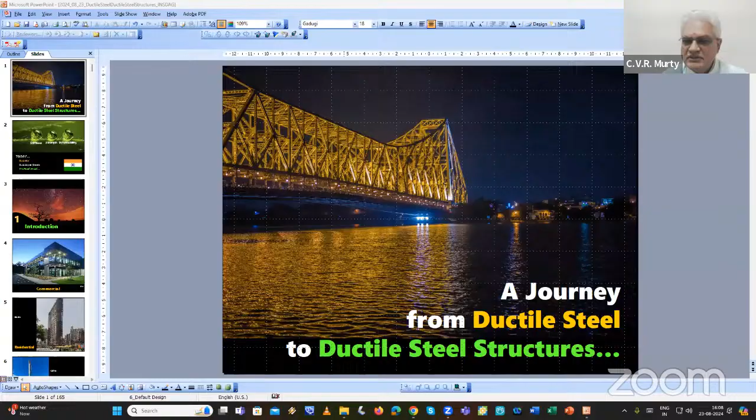Is the screen visible? Yes, sir, it is visible. Yes, sir. It's visible. Okay.

So the subject here is a very wide canvas that we have chosen for today's discussion and lecture, the Foundation Day lecture: a journey from ductile steel to ductile steel structures. And that is where we are bringing in a number of experiences that we have from the professional practice as well as from the academic work that we have been doing over the last 30 or about 40 years.

We're carefully watching the practice, how the practice is going, and we are also equally concerned, like Dr. Mishra Saab just mentioned, about the dwindling number of teachers in the subject of steel structures at the undergraduate level. It's a matter of serious concern, and while that remains, the practice is racing at a very fast pace.

So today's discussion will focus around ductility, a subject that has been understood by some but misunderstood by many. And ductility will be discussed at 5 levels, and then we will close the discussion. But to begin with, I must say that 3 words that will be used rather regularly in today's 90 minutes are stiffness, strength, and deformability.

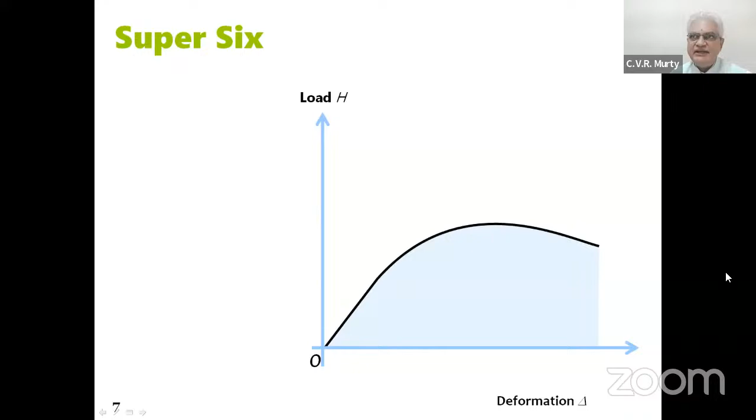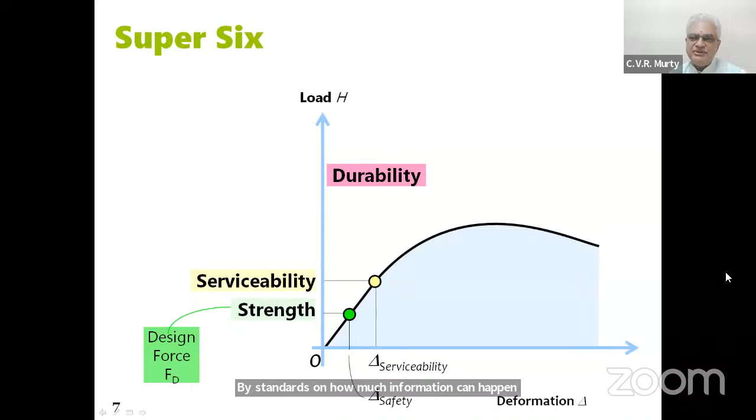So what are we going to discuss today? When you look at design, there are 6 aspects that you need to worry about. Strength, for which design forces are specified by standards. Serviceability, for which limits are specified by standards on how much deformation can happen. Durability, to make sure that steel doesn't corrode, and how to protect it.

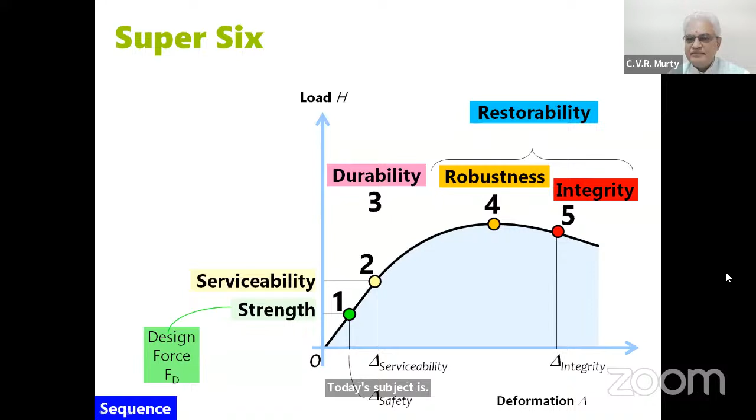And then robustness, integrity, and restorability are the 3 new items on the block, which you will start seeing appear in the new Indian standards in the days ahead. Today's subject is not to talk about all 6 of them, but just the last 3, which involve ductility. Ductility would come in once the structure goes into material nonlinear behavior. Then ductility will be the item of focus for us.

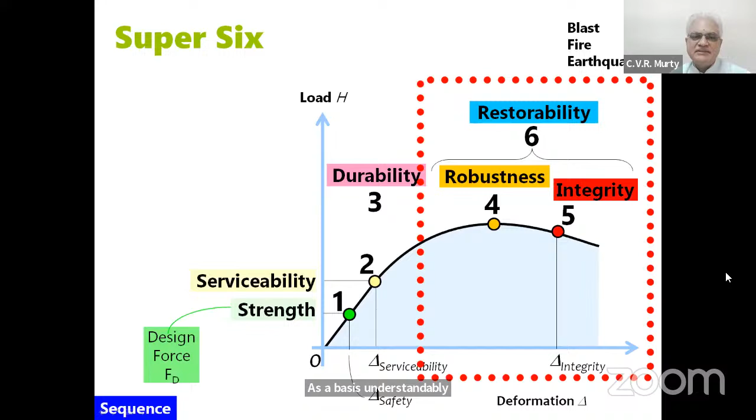In particular, we are talking about blast, fire, and earthquake as the backdrop of the demand on these structures. But today, I will use only one of them as a basis, understandably owing to the bias that I have had over the last 4 decades on the subject.

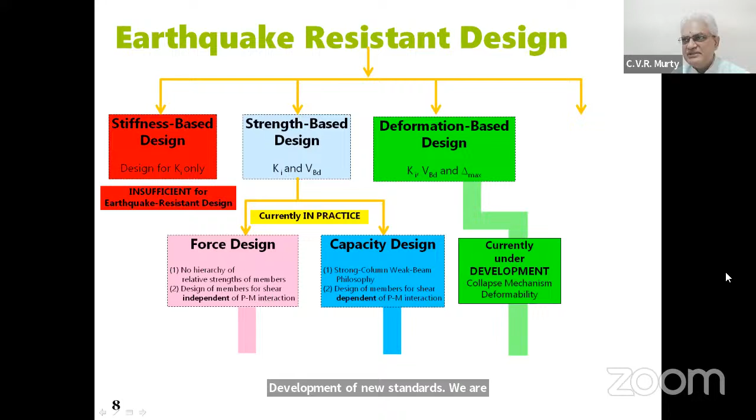When I look at earthquake resistant design, we have graduated from stiffness-based to strength-based in practice. In the development of new standards, we are currently at deformation-based, and currently in research is energy-based design. And when you look at the built environment, you will place them under normal, important, special, and critical structures. So the applicability of the older methods is at the lower level of structures and not for the important and critical level of structures.

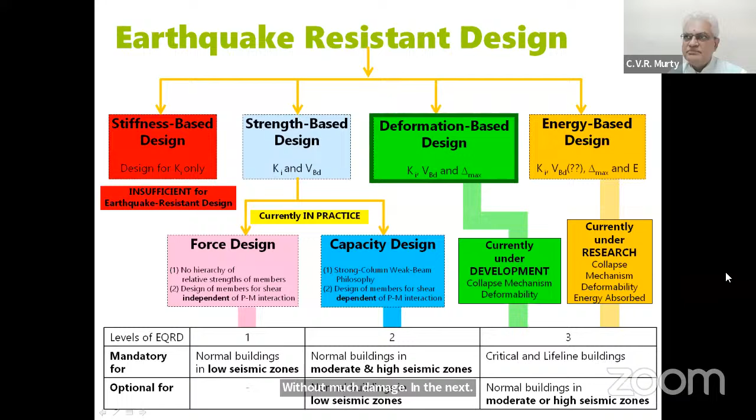So the critical and important structures will require a deeper understanding of the subject of steel structures if you really want them to survive without much damage in the next earthquake that we are going to see. So once again, deformation-based design is the word, and that will be the emphasis for us in the next 90 minutes.

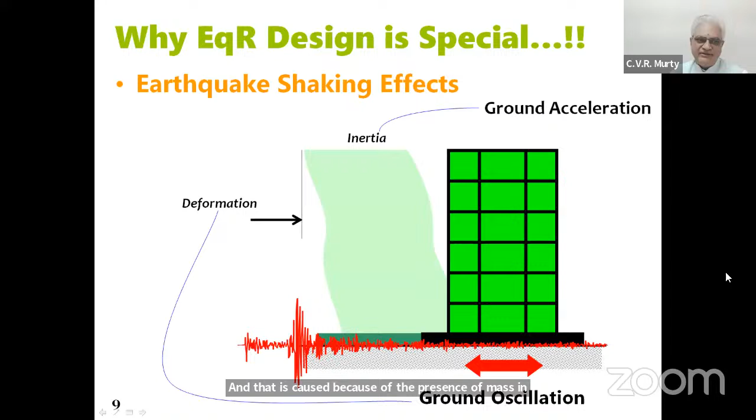Earthquake-resistant design is special. That's because there's nobody pushing the structure, but there is a movement imposed at the base of the structure. That ground oscillation leads to relative deformation in the structure, and that is caused because of the presence of mass in the structure. And so inertial effects actually drive the deformations that are getting induced in the structure.

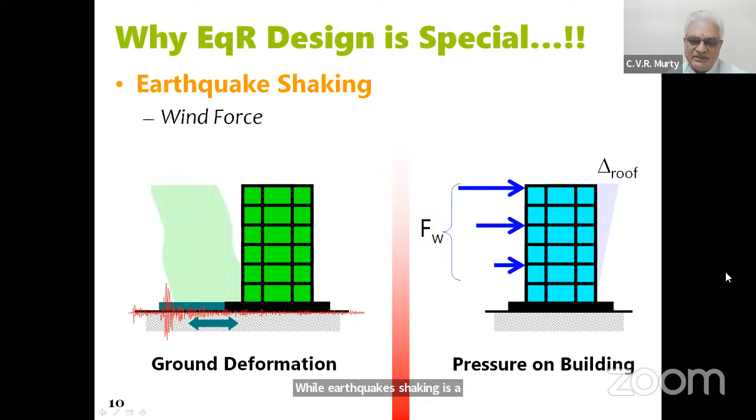It is important to know that there is a significant difference in the design philosophy for earthquake and wind effects. While earthquake shaking is a displacement load, wind is a force load. And so when you look at design under wind load, we are not expecting any damage to happen. The structure should more or less remain elastic.

I might warn you here that in the road ahead, a lot of documents are getting populated on the internet which talk about performance-based wind engineering, where under wind also they will allow damage. But I must recall a recent incident in Hong Kong, where a typhoon led to the sealant between the glass windows and the steel frame to go apart, and the water just came in. And for 3 nights, the entire population of those buildings were actually mopping their floors and getting the water out of their building. This is again because of the fact that steel structures are flexible.

One, the sealants are brittle. Two, the sealants have a finite life and you need to keep replacing them regularly over time. This is where, on effects which are happening on a daily basis, we cannot afford the luxury of bringing in damage, because the discomfort that the entire population in Hong Kong has been subjected to is unacceptable in terms of professional services being rendered by us.

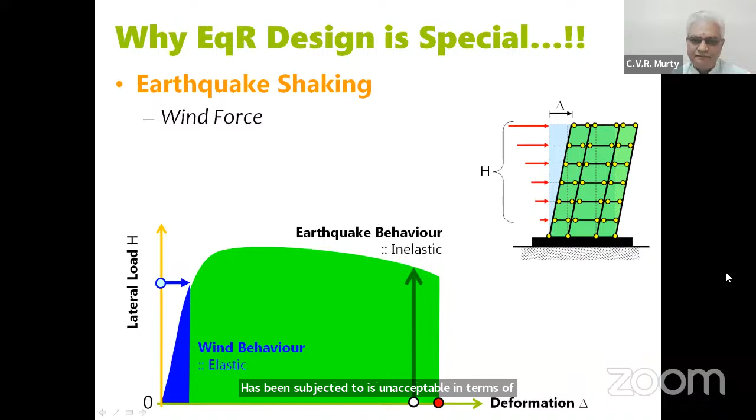But when you look at earthquake shaking, there are different levels of shaking, and the damage will increase as the level of severity of the ground motion increases. All that happens is the displacement demand increases. You would notice that we are not putting arrows from the vertical axis, but we are putting upward arrows from the horizontal axis, which is the deformation induced in the structure. This deformation will depend on the severity of shaking.

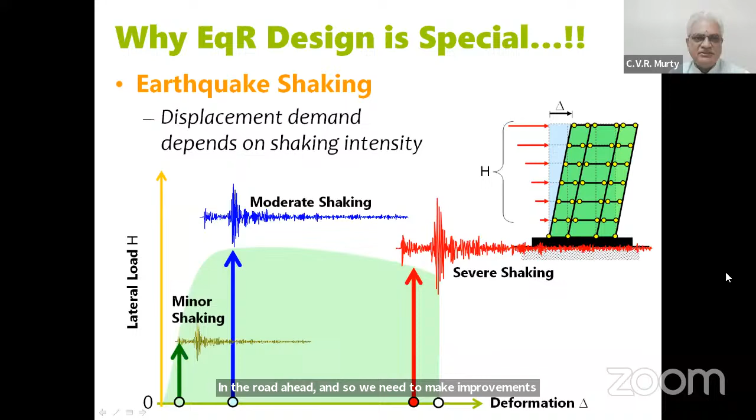I must also mention here that most standards worldwide today are only talking about what happens if you are far away from the fault region, and nobody is talking about the near fault effects in most documents. And this is where the trouble is, that 30% of India is sitting in the Himalayas. And so we need to make sure that we protect their lives and property in the road ahead, and make improvements in the estimates of deformations induced in structures in the Himalayas.

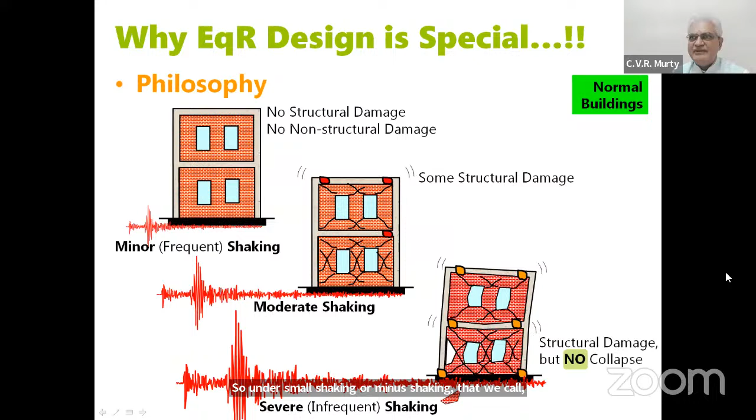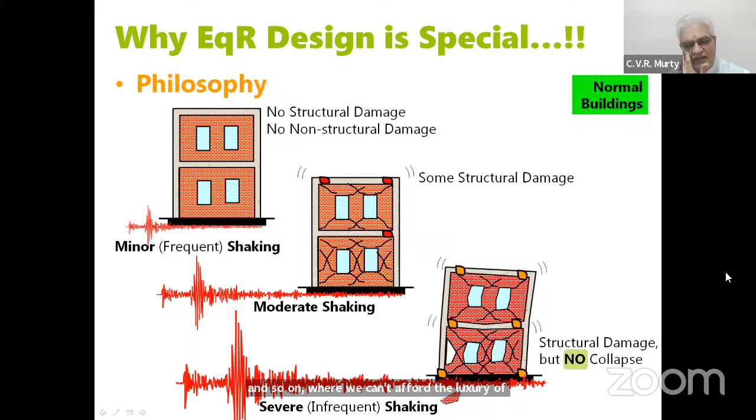So under small or minor shaking, which is regular, frequent, we should have no structural damage. Under moderate, some structural damage, and under severe, no collapse. But this is okay for normal buildings. For critical buildings like hospitals and schools and so on, where we can't afford the luxury of structural damage to the level that the building cannot be used, we need to have a different philosophy. And that is what is slowly coming into the design standards.

One of the items that comes into play is actually the hazard level. You take a site and we know the maximum hazard that it can experience over a long period of time. It's a rare event, yes. So even though it is rare, if you have to build dams or nuclear power plants, you don't take chances and use that itself for design. But if you are building critical structures, you will want to say, maybe I'll not use the entire one. I'll use a part of that hazard level for the purpose of design and allow a little bit of damage under this rare event that may happen.

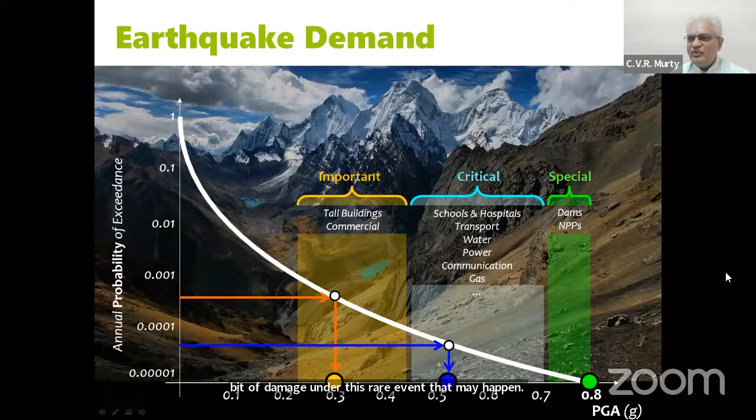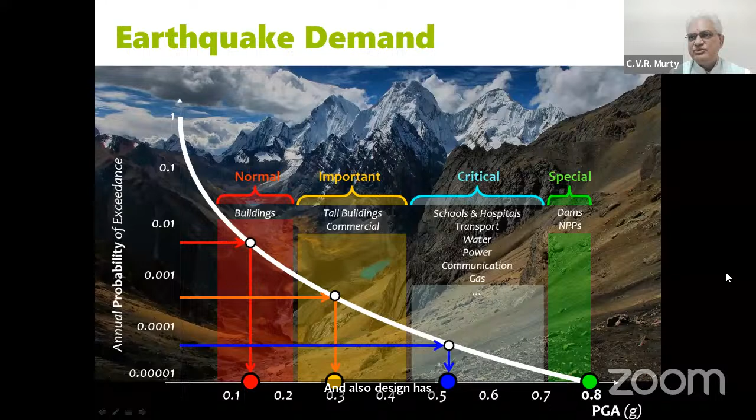And instead of the full value, you will take a large fraction of that as a basis for design. In important structures, you will take more chances. And in normal structures, you will take a significant chance in terms of allowing damage in the structures. It is for this reason that ductility increases as you go from the right-hand side to the left-hand side. In buildings, ductility demand increases, and design has to now provide for that demand. And so we need to understand ductility a lot more carefully.

So while I will define ductility a little later, we understand from the 7 virtues of earthquake resistant design that there are 2 words or 2 properties of structures which are used interchangeably, and I want to have them not used interchangeably. And the 2 words are ductility at number 4 and deformability at number 5. We want to separate the 2, and we will show you why we need to separate the 2.

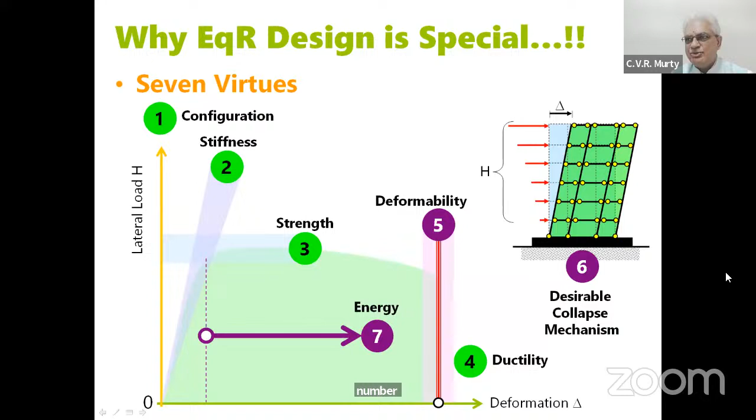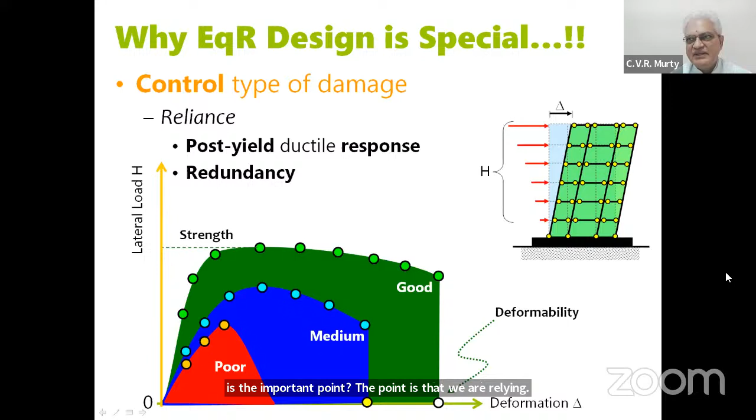When you look at the damage that is induced in the structure, we want to control the damage, and the damage should be of acceptable nature, which means that we need a large amount of inelastic response, but not lose so much strength. But if your structure has been designed by a very old code, you may be a little worried, because that structure will perform like the red structure on this diagram, while today's standards may be pushing it to blue and in some cases to green also. So if you have an older structure, we need to assess its performance. What is the important point? The point is that we are relying on the post-yield performance, and it's called the ductile performance or ductile response of the structure.